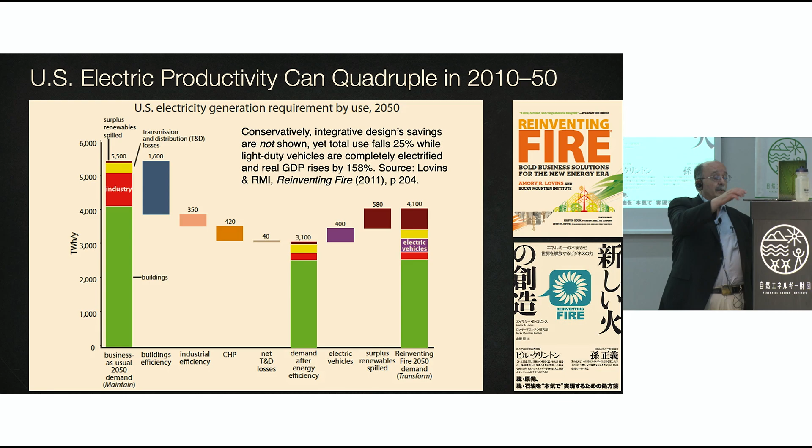Whatever exists is possible. More specifically, integrative design let our retrofit of the Empire State Building save 38% of its energy with a 3-year payback. Three years later, our cost-effective retrofit saved 70%, making this half-century-old government complex more efficient than what was then the best new US office or the best Japanese small office retrofit, where Takenaka saved 72% of the energy in their Higashikanto office without disturbing the occupants.

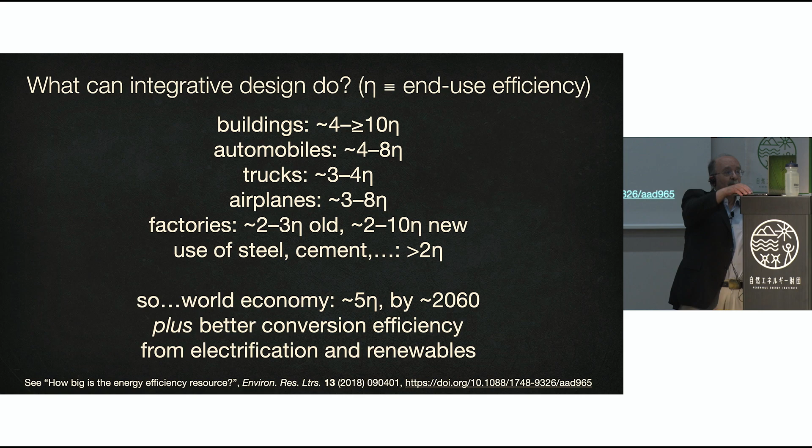Across all sectors, integrative design could raise energy productivity by about 5-fold worldwide and by probably at least 4-fold in Japan, especially if integrative designers were paid for what they save, not for what they spend.

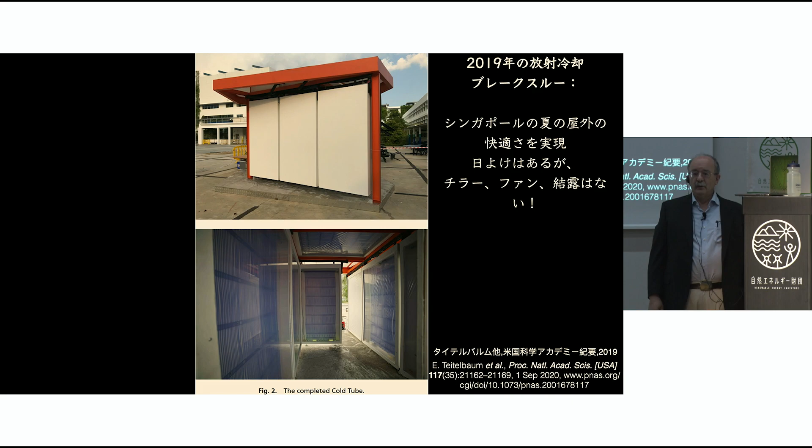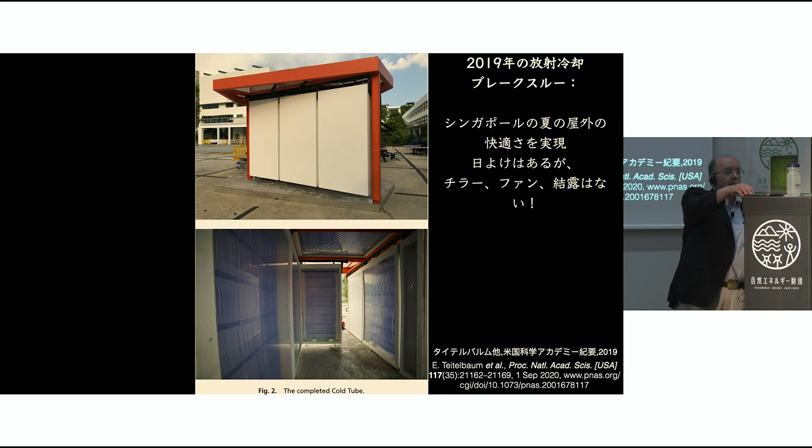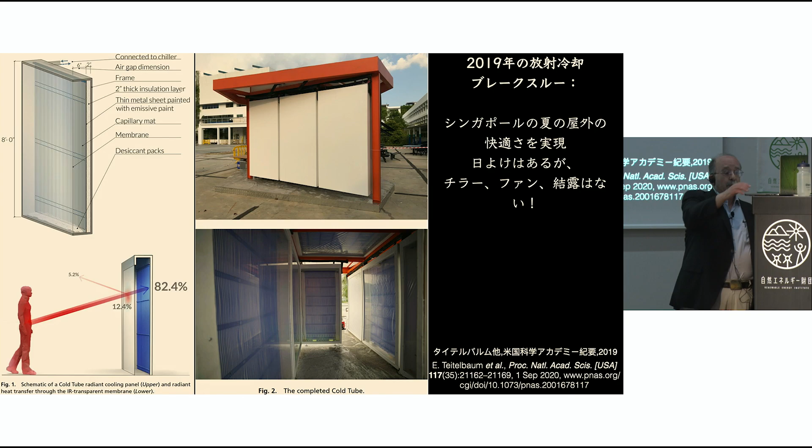Newer techniques are especially exciting. For example, the best big building air conditioning systems in Singapore are 3 times as efficient as the Japanese norm. They cost less, they work better, but they may just have become obsolete. In an experimental 10 square meter shaded pavilion, Singaporeans stayed comfortable outdoors without fans, without breezes, without cooling or drying the hot, humid air. How? Well, people were cooled solely by absorbing far infrared radiation from their bodies into vertical panels cooled to 23 to 25 degrees by circulating cool water, and separated from the humid air by a thin plastic film.

This arrangement delivered comfort in 32-degree air and 80% relative humidity. Such modest cooling can be done passively by special surfaces, proven also in Japan, that radiate infrared rays to the sky, providing Kanto or Kansai summer comfort with no or almost no electricity and with far lower peak electric loads.

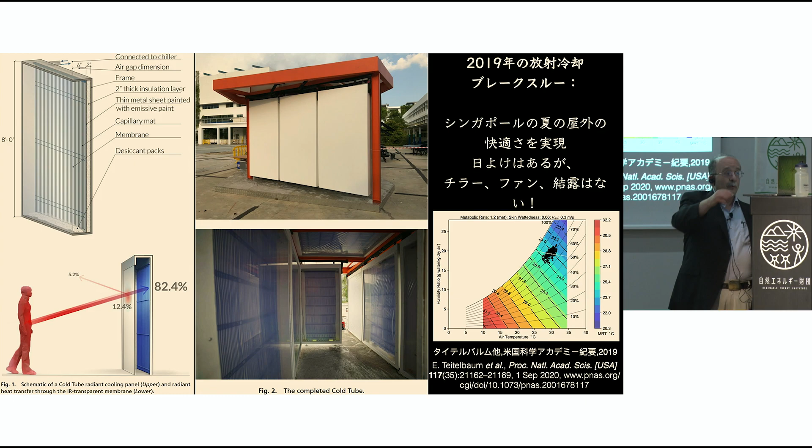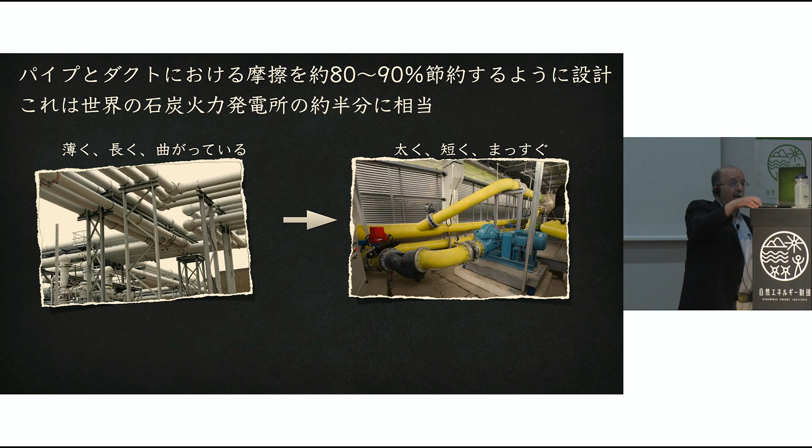For example, fully deploying better pipe and duct design in buildings and industry can save 80 to 90+% of the friction and therefore of the pump and fan power. If everyone did this, it could save half the world's coal-fired electricity, with paybacks typically less than a year in retrofit and instant in new construction. But this is not yet in any standard engineering textbook, government study, industry forecast, or climate model. Why not? Because it's not a technology. It's a design method. And few people yet think of design as a way to scale rapid change.

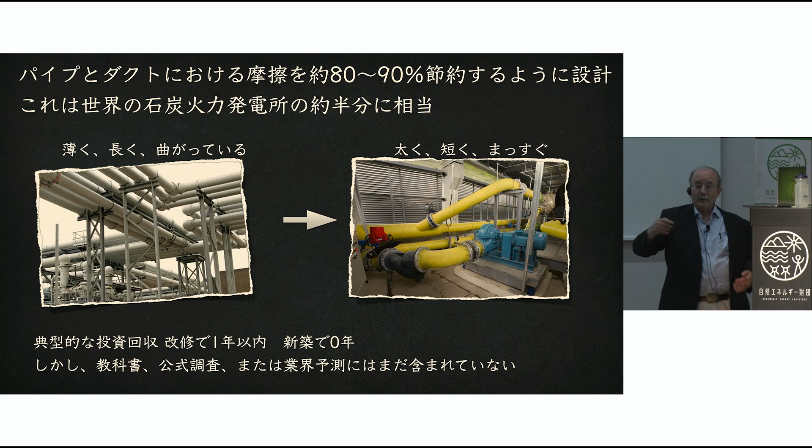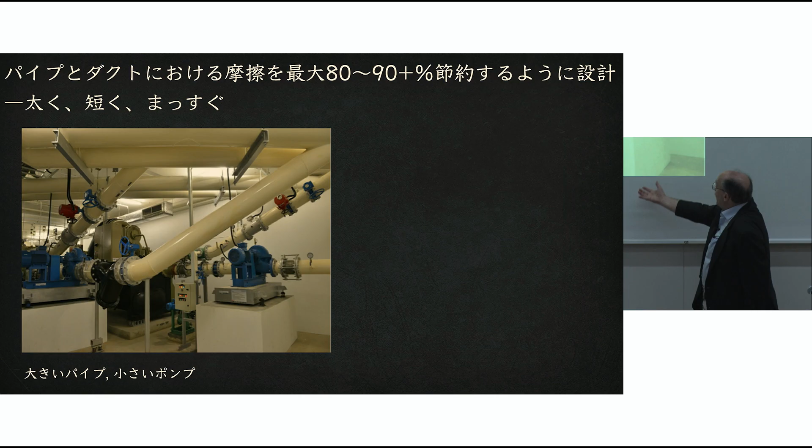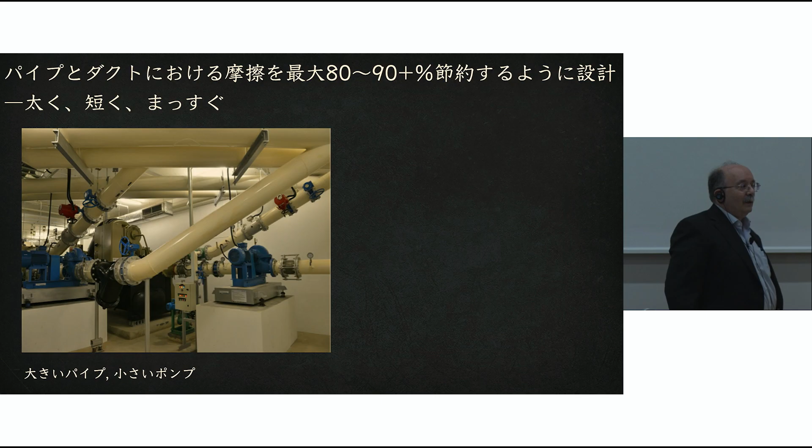To wring out friction, we simply use big pipes and small pumps, not small pipes and big pumps. And notice that this pump is raised up on a plinth to meet the pipe rather than dipping the pipe down to the floor to meet the pump and back up again with 4 elbows, 4 right angle bends, and much friction. To eliminate elbows and their friction, we lay out the pipes first, then the equipment. We lay out supply pipes as if they were drains. We bend minds, not pipes.

And each unit of flow or friction saved in the pipes saves 10 units of fuel, carbon, pollution, and cost at the thermal power station.

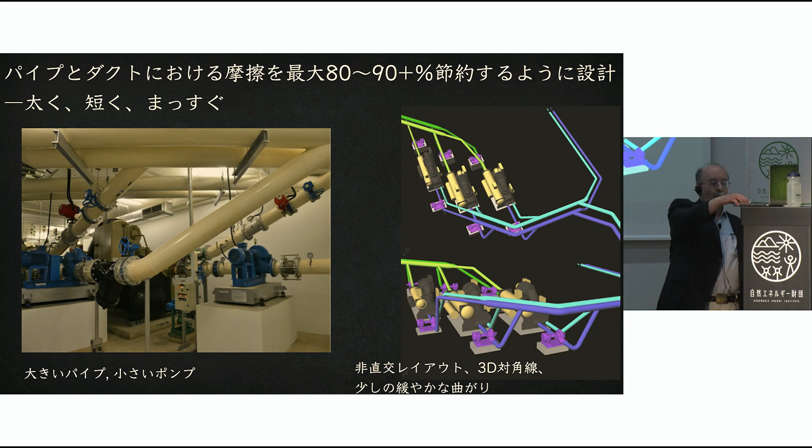Japan's mighty industrial sector makes and uses copious energy-intensive materials, like the cement and steel that now release 15% of the world's CO2. But elegantly frugal structural design can profitably save at least half of the world's cement and steel. For example, substituting tension for compression structures typically gives better strength, beauty, and cost with 1/8 the tons. Fabric forms can save half the concrete, plus further weight savings when you need less strength to hold up less weight.

3D printing of this airy bridge can eliminate most of the weight of the concrete structures that mainly support themselves, not their payloads. The stainless steel bridge is 3D printed.

Floor slabs are half the total weight of a typical mid or high-rise building, but a 5 centimeter thick folded concrete slab or a shallow vaulted dome can replace a 30 centimeter thick flat slab, cost less, and save 3/4 of the cement and all of the steel.

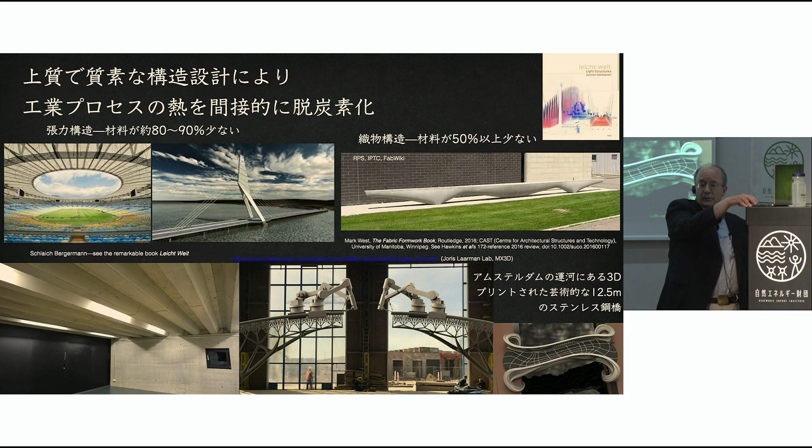Then a new building with thin floor slabs and better energy design can save another 15% of the core structural materials and 3/4 of the energy use, while increasing net rentable space by a stunning 55%, as in this Singapore building.

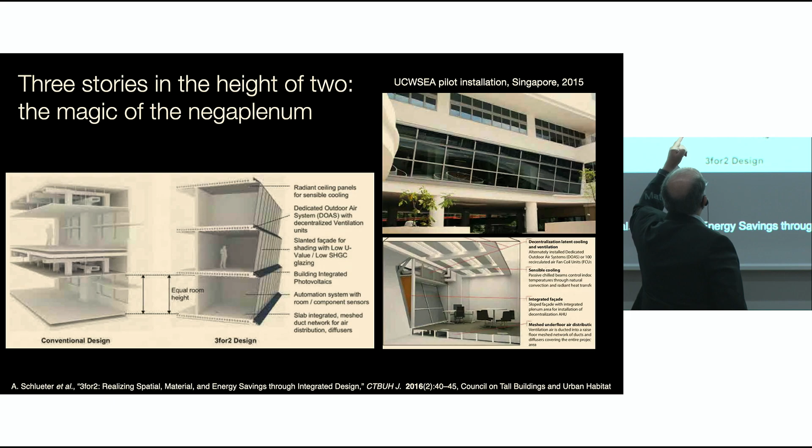How? Well, designing out a vertical meter of mechanical plenum at each story and using the thin slabs then allows you to fit 3 stories of normal 2.8 meter ceiling height into the vertical space now used for 2 stories. Cost, complexity, and time all fall dramatically. And imagine how this works at Japanese land prices.

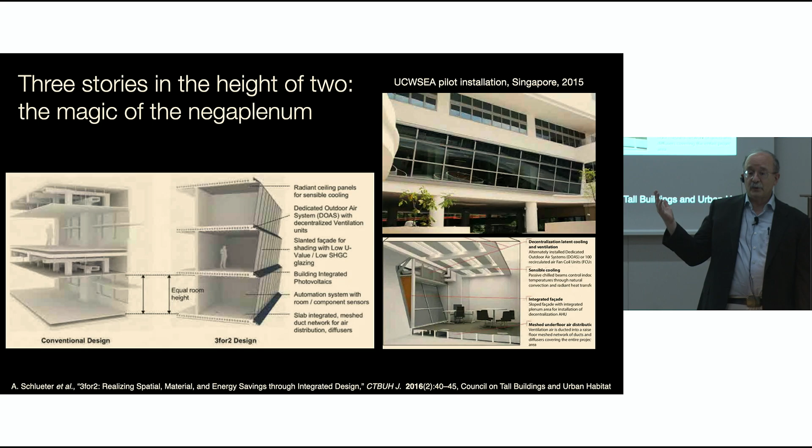But the utility, having tried and failed to prohibit solar hookups, then wanted to confiscate any leftover solar production without paying for it. Angry customers could then respond with smarter appliances that move 80 or 90% of the household loads conveniently into the solar hours, costing the utility nearly all its intended windfall and most of its ordinary revenue. So this anti-solar tariff is a well-aimed boomerang that will actually speed and expand solar adoption by educating and annoying the customers so they leave the grid faster.

Happily, RMI was able to help the Hawaiian parties agree on more sensible strategies, but it is now economic there, just like Japan, for new houses not to connect to the grid.

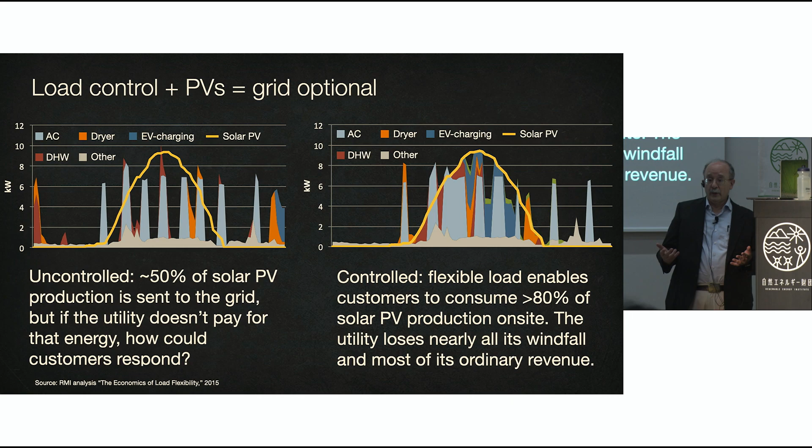This summary of 14 years of experiments with 4 kinds of time-dependent electricity pricing on 3 continents shows peak reductions above 30% or even above 50%.

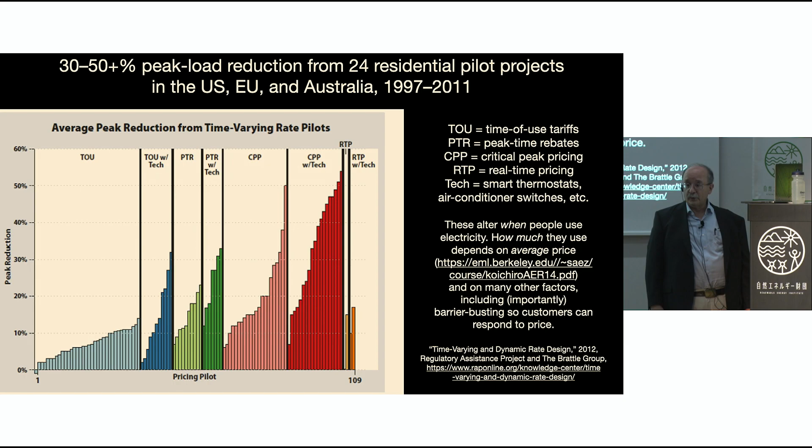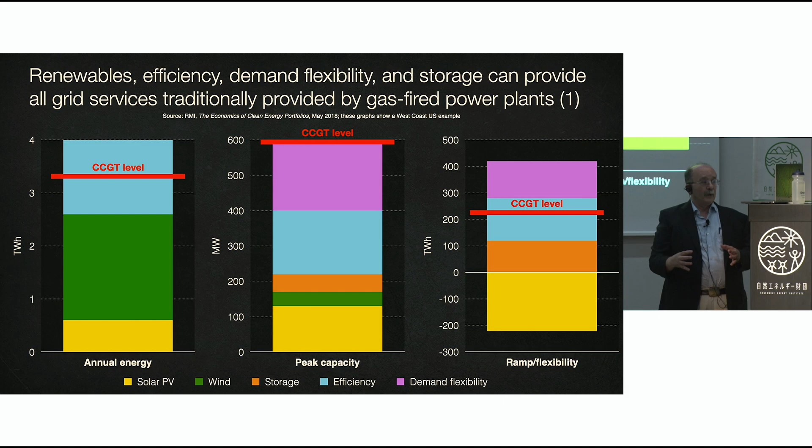Even with cheap US fracked gas, new and old combined cycle gas-fired power plants no longer have a business case. Their market is collapsing because all of their outputs - energy, capacity, ramping and flexibility, and ancillary services like voltage and frequency stability - can be provided better, faster, and cheaper by locally customized, carbon-free, clean energy portfolios, combining demand-side, renewable, and storage assets. U.S. investors promptly noted this analysis and canceled most of their planned gas plants.

By 2 years ago, only a single new gas plant in the entire United States could be briefly economically justified. Of course, U.S. gas costs far less than Japanese LNG, and neither country's gas price includes the value of carbon or of escaped methane or of price volatility in the fuels.

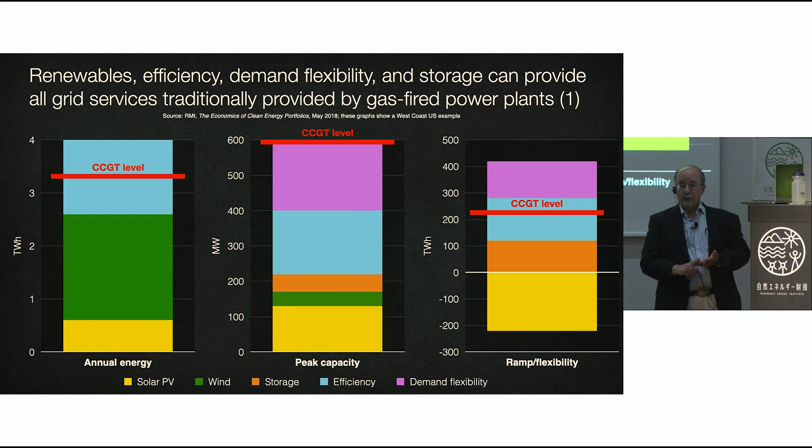So without burning gas or coal, how can we keep the electric grid reliable as it becomes renewable? Well, without fossil-fueled backup, shown in red, there are 10 carbon-free ways, conceptually sketched here, to balance a renewably powered grid reliably across all timescales. Our choices are not limited to big batteries, shown in magenta.

These typically come last, not first, so we need not wait for a storage miracle, although some are emerging, and the market isn't waiting. The two biggest resources, negawatts and flexiwatts, are both about three times bigger than commonly assumed, but there are eight others too, and some of them are very big.

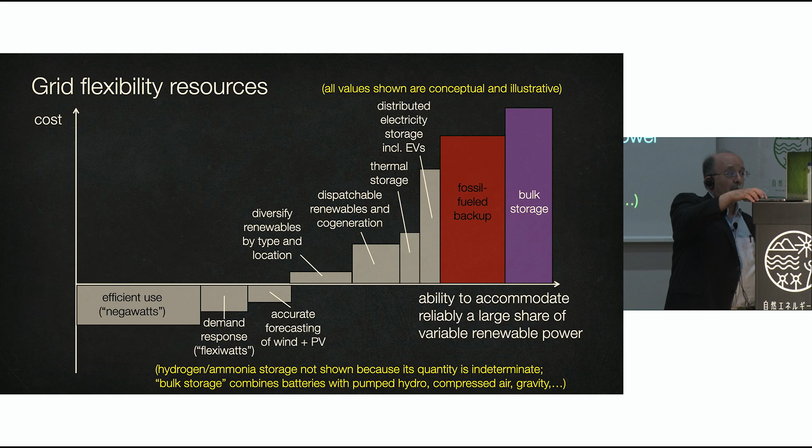For example, the electric vehicles now taking over the world auto market are starting to charge bidirectionally, and they could add at least several gigawatts per year of storage in a country like Japan, probably more, plus other valuable services. Two years ago, one European aggregator was earning an eighth of a million yen per auto battery per year by selling back to the grid 13 of 21 available services from vehicle to grid.

Australia now gets more frequency stabilization from batteries, demand response, and other inverter-driven resources than it does from coal plants, making that valuable service 39% cheaper in the past year, and soon electric cars will join that supply.

So Japan's policy of modest energy savings and favoring thermal power plants continues to be presented as necessary for energy security. We are still told that only coal, gas, and nuclear stations can keep the lights on because they are 24/7, while wind power and solar power are variable and thus supposedly unreliable.

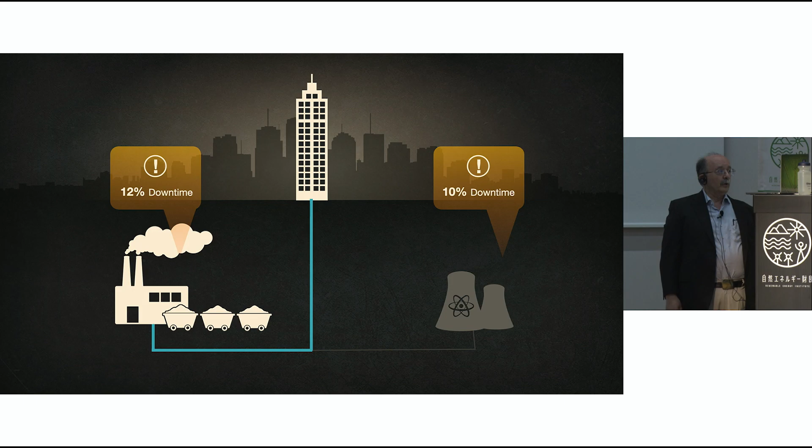Indeed, we built the grid because no generator is 24/7. They all break, and when a giant power plant fails, you lose one billion watts in milliseconds, often abruptly, often for weeks or months. Grids manage this intermittence by backing up failed plants with working plants. And in exactly the same way, but often at lower cost, grids can manage the forecastable variation of solar and wind power by backing up those variable renewables with a portfolio of other renewables, all forecasted, integrated, and diversified by type and by location.

Let me illustrate this with a difficult case that RMI analyzed 13 years ago: the big, nearly twice the size of Japan, hot, often humid state of Texas, which has virtually no hydroelectricity, a mainly Kansai-like climate, and a nearly isolated grid.

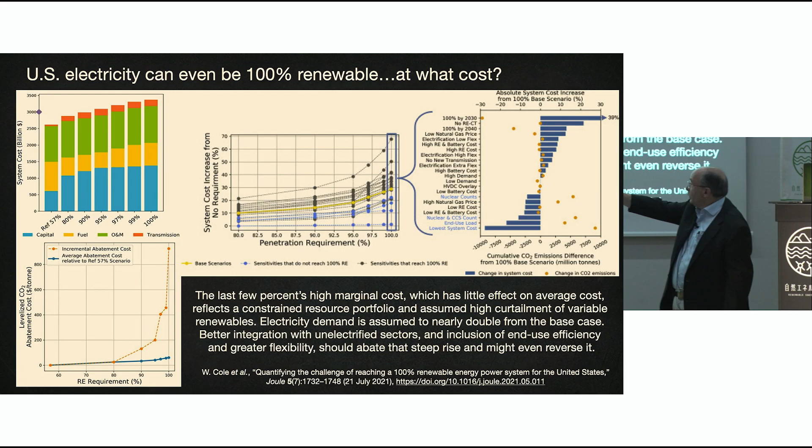In 2021, the U.S. National Renewable Energy Lab published a supply-side analysis of how much more it could cost the United States to go from 90 or 95% to 100% renewable electricity by 2050. And you see in the last 4 bars in the upper left that the average cost increases very little. Now, in the lower left, you see a steep rise in the marginal cost. Why is that? It's probably an artifact of the models omitting many important solutions, which I have summarized already.

For example, the same national lab competed efficiency in buildings against storage very conservatively and found that this can cut investments by about a factor 10 by displacing long-duration hydrogen storage and green electricity to make it. In 4 key U.S. regions, the supposed need for long-duration storage, for example, by hydrogen or ammonia, simply disappears. In the region with the climate most like Kanto, it decreases by 97%.

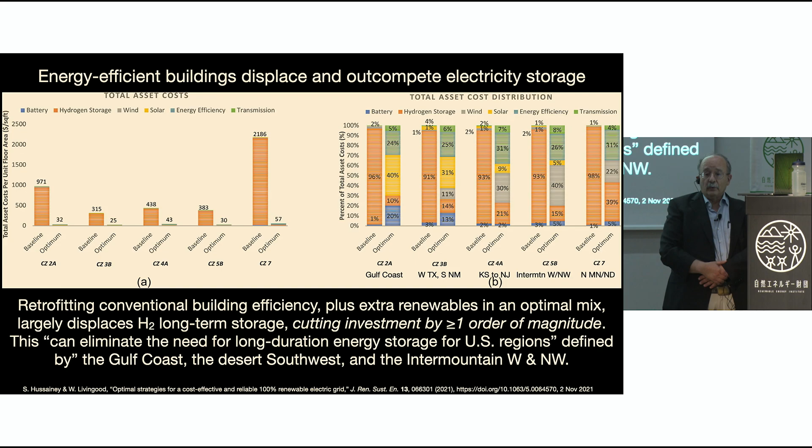2 weeks ago, a major U.S. government study showed how to save up to 41% of U.S. buildings' energy use and 91% of their carbon emissions, and found this would cut power system costs by over $100 billion each year. That's a third of the total cost of decarbonizing the U.S. grid.

Now in Japan, and for 82% of global power generation, unsubsidized renewables, solar in yellow, wind in blue, are now the least cost source of new bulk electricity. Bloomberg found that the cheapest way to meet a flat load is now solar or wind power, plus backup, which can be demand side, storage, renewable, or fueled. Putin's war makes avoiding insecure fossil fuel imports at volatile prices even more valuable.

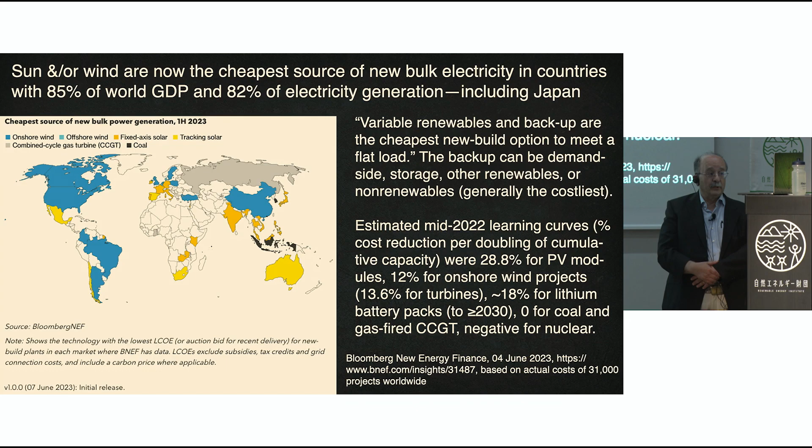As efficiency helps renewables save fossil fuels faster, renewables are beating thermal power almost everywhere with stable and several-fold lower costs and true energy security, especially from distributed generation. Our home's rooftop solar power works with or without the grid. So should everyone's. Resilient connections to the grid should be the standard design, especially in a country with earthquakes and typhoons. Flourishing microgrids, mainly to improve resilience, are now being delivered as a turnkey service in 28 of the United States.

And today, Japan's new solar electricity costs less than 10 yen per kilowatt hour. That's about half the operating cost of fully amortized coal-fired or LNG plants. New solar also beats restarted nuclear plants. So Japanese solar and wind power outcompete existing thermal stations and should be dispatched first, before inflexible nuclear plants, to unburden customers and boost Japan's competitiveness.

But national and utility policies still shield legacy assets from competition by doing the opposite of economic dispatch. So curtailment, that is, idling existing renewable plants in order to run costlier nuclear and fossil plants, has now spread to every region of Japan except Tokyo.

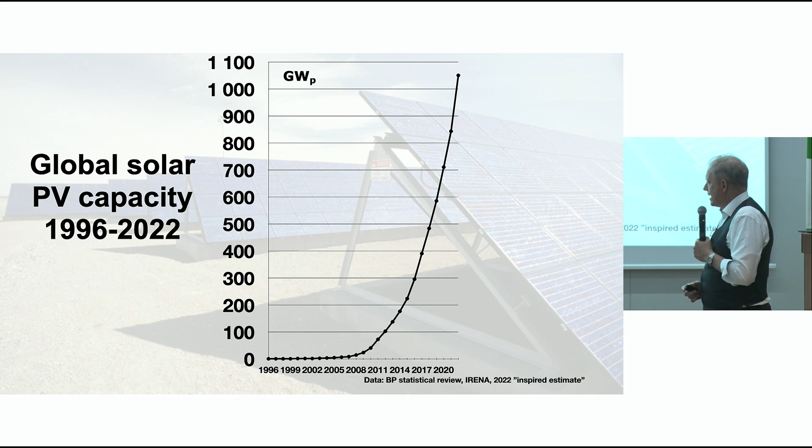And what we've seen since is that indeed some countries have subsidized solar and wind power. If you look at the solar development here, you can see that the deployed PV capacity in the world has risen exponentially during the last 3 decades. Here, Japan was early in the late 20th century deploying solar PV. Japan had the most advanced solar PV manufacturing in the world at the time.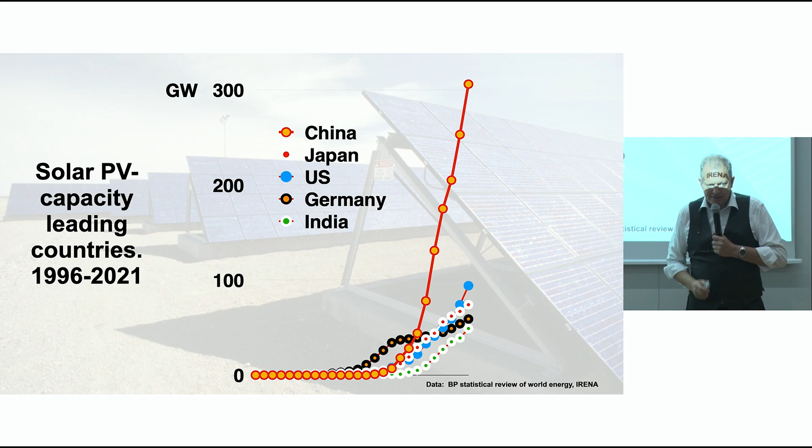Then Germany started subsidizing solar, and for the first few years of this century, German households paid for a lot of the industrial experience that was accumulating, first in Europe, later in China. China also started to deploy solar PV and is now by far the leading country in the world. The US is number 2, and Japan is in solar not so bad. Japan is number 3.

As a result, costs did come down, and 2016 was a magnificent year for decreasing the cost of renewable electricity. In February, in Peru, solar electricity was purchased at a price below 5 US cents per kilowatt hour, which was then considered tremendously low. Some people said this is not possible, it's too low, it won't happen again for a long time. But already a couple of months later in May, in Dubai in the Middle East, they managed to procure solar electricity at below 3 cents per kilowatt hour.

And before the end of the year in September, in the neighboring emirate, they came down below 2.5 cents per kilowatt hour. And in Mexico, in the following year, in 2017, there was solar electricity purchased below 2 cents per kilowatt hour, below $20 per megawatt hour. In Portugal, in southern Europe, we came down to below 1.5 cents per kilowatt hour, euro cent though.

And then in 2021, the contract in Saudi Arabia at around 1 cent, which I think is still the world record in publicly announced procurement price for solar electricity. And 1 US cent per kilowatt hour, that is very cheap.

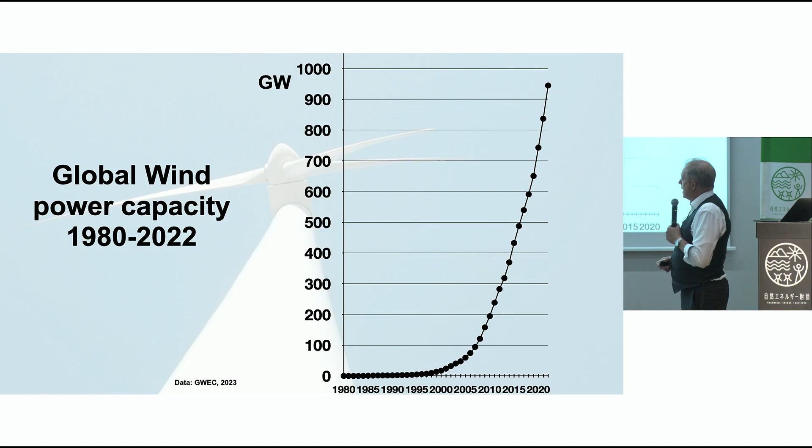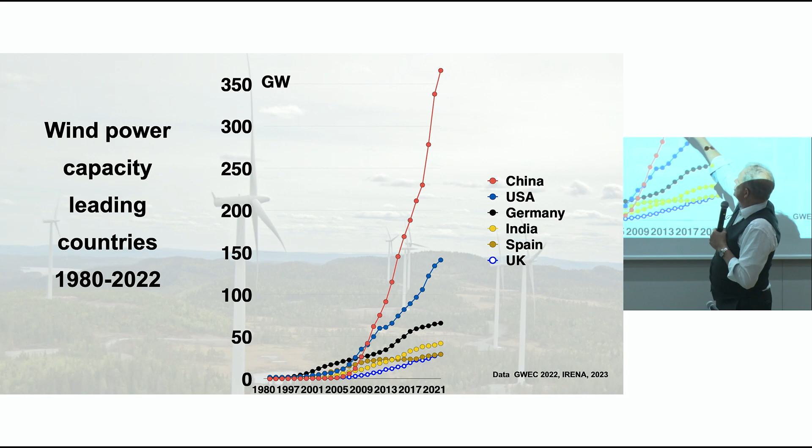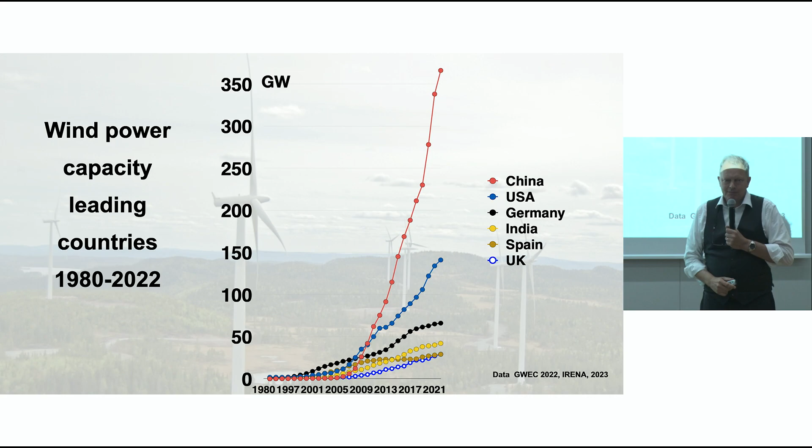Wind energy increased in a similar way, has not yet passed 1,000 gigawatt, or has passed this summer, but had not at the end of last year. For wind power, it's the same. Germany paid a lot in the beginning of the century. Since 2005 approximately, China has taken off and is now by far the country with the highest installed capacity of wind power. The US is number 2. Japan is not on this list. Here we have Germany, India, Spain, and United Kingdom as the top countries in the world.

Costs were also coming down in 2016. We saw in Morocco in North Africa prices between 25 and 30 US dollars per megawatt hour, 2.5 to 3 cents per kilowatt hour, and the world record still, I think, for publicly announced contract price is from Mexico, where Enel promised to deliver below $18 per megawatt hour.

Offshore wind, which is now on the agenda in Japan, was for long considered to be a source of electricity with a huge potential, but unavoidably high cost. Here too, costs and prices came down during 2016. In the summer in Europe, there was a procurement off the Dutch coast where Danish company Dong, now Ørsted, won a contract with a price of just above 70 euros per megawatt hour. It was then considered record low, but it's still high.

Nothing happened in August, but in September, Swedish power company Vattenfall won a bid off the Danish west coast with a price of only 60 euros per megawatt hour. And nothing happened in October, but in November, Vattenfall won a contract off the Danish east coast at Kriegers Flak with a price below 50 euros per megawatt hour.

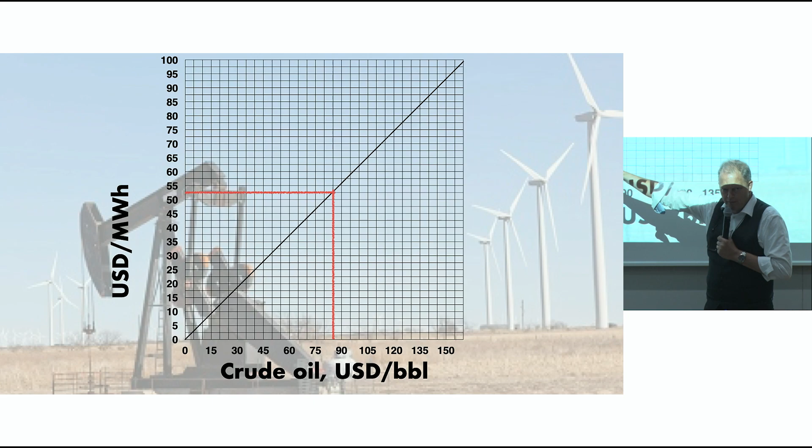And those of you with the capacity to memorize numbers more than 5 minutes, you remember that we have seen prices for solar and wind power in this range from $10 up to maybe $30 per megawatt hour, meaning that the total cost of solar and wind electricity is now just about half of the price of the energy in crude oil. And that makes it feasible to start replacing oil with renewable electricity in other sectors. And we have seen it starting.

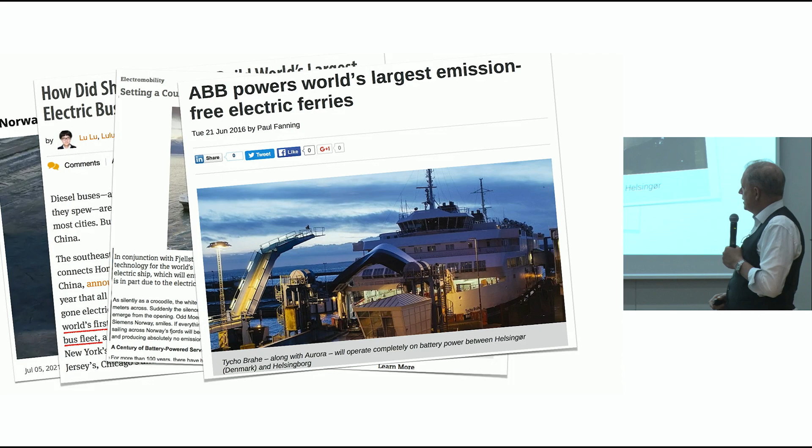We see it in the automotive sector, where cars are increasingly electric. We see buses that are electric. Quite impressive here, Chinese city Shenzhen, where already a few years ago in 2018, 100% of the city buses were battery electric. There were more than 16,000. Ferries can be made battery electric. Short line like that, slightly longer like this between Sweden and Denmark. And you can have electric airplanes.

I must admit I said very self-confidently 15 years ago at a conference that we will never see a battery electric airplane because batteries are too heavy. I was wrong. There was a very polite young man in the audience. He didn't say anything in public, but afterwards he came up with a little note saying, check this website. I checked the website. It was a Chinese company already 15 years ago offering a two-seater aircraft that was battery electric and had a range of 2 hours. Since then, I've never said it's impossible.

It is possible. Airbus, the European airplane manufacturer, put out this two-seater trainer aircraft in 2015. We now have companies like Heart Aerospace developing battery electric airplanes. And it's so attractive they managed to sell the planes before they even constructed them.

When this happened, that batteries were increasingly deployed in the transport sector, the battery manufacturing increased. The battery manufacturers accumulated experience, learned to bring down cost, and they got economies of scale because the automotive industry needed a lot more batteries than we do for our laptops and our mobile phones. When Tesla built their first so-called gigafactory, the large battery cell factory to supply the Tesla cars, they roughly doubled the world's production capacity for lithium batteries. And of course, cost came down.

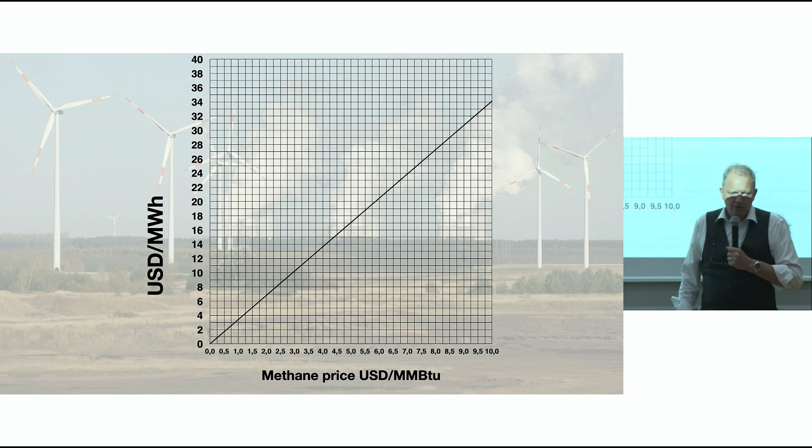Fossil gas, natural gas, is also difficult to see how the price relates to the electricity price, because here the unit is even more strange. It's US dollars per million British thermal units.

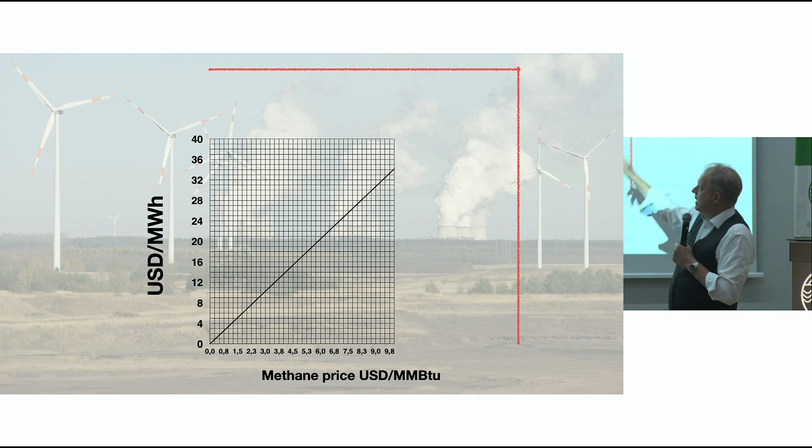Anyone who recalculated that into dollars per megawatt hour today? Not so usual, but it can be done. What used to be a typical price of about $8 per million British thermal units would still be at the level of solar and wind. But now, in the last year, we've seen a shift where gas has become more expensive, and now that is also at the level of oil, and thereby more expensive per unit energy than renewable electricity.

And thus you can start using electricity to produce hydrogen to replace fossil gas. Many see the opportunity in the Middle East. Abu Dhabi, for example, sees this opportunity to produce hydrogen and attract energy-intensive industries. In Europe, Portugal and Spain have a similar ambition.

When you can produce hydrogen at a low cost from electricity, you can go one step further and produce liquid fuels, electrofuels. Then you need carbon dioxide. Today that's easily available because you burn a lot of fossil fuels, but you can also be more ambitious for the long term and say we will only use carbon dioxide from biomass, which is recently taken from the atmosphere.

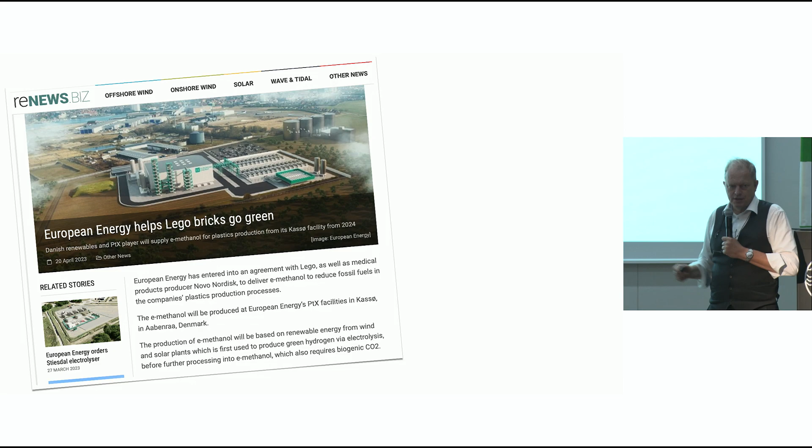In Europe there are two examples. One is the Danish toy manufacturer Lego, making those small plastic pieces. They've contracted a supplier of feedstock for their plastic manufacturing that is using electricity to produce hydrocarbons that are then used to produce these plastic pieces.

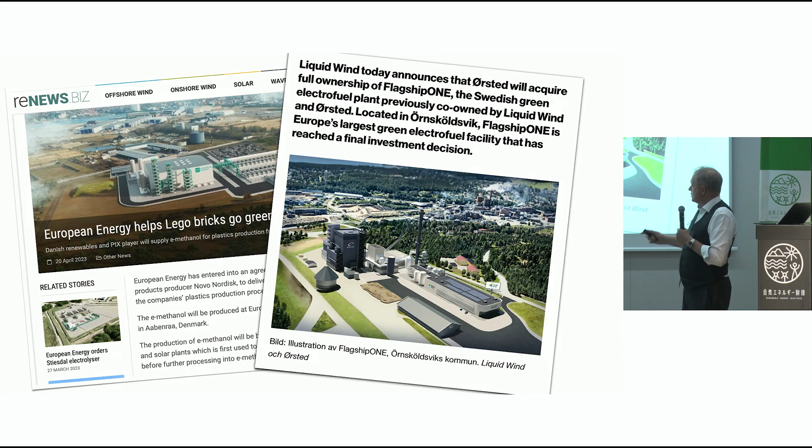And in Sweden, we have a project now being under construction where the intention is to use renewable electricity and carbon dioxide from a biomass fuel cogeneration plant to produce methanol, which is going to be sold to intercontinental shipping, where battery electric solutions are not yet viable.

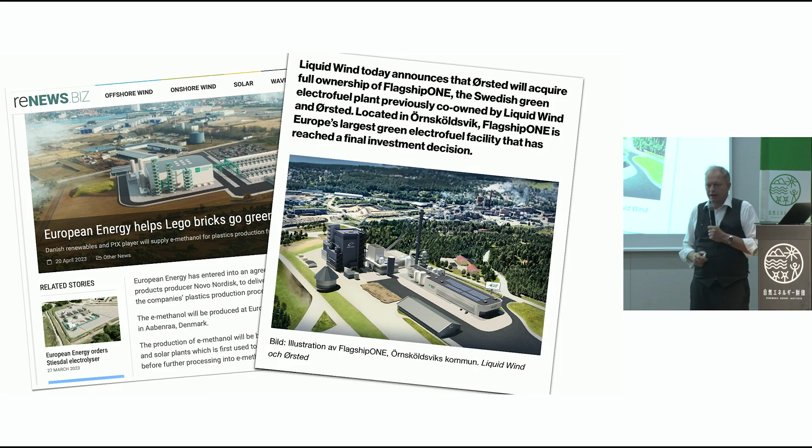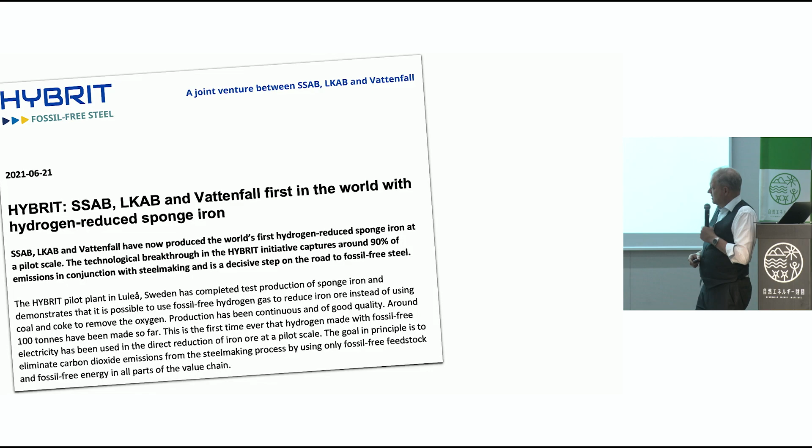Coal is the cheapest of the fossil fuels, but still now in the range of the best solar and wind electricity in the world. And that gives the opportunity to use this hydrogen to replace coal in the reduction of iron ore into steel that can then be produced without carbon dioxide emissions in the process. There are other competing technologies to do this, and the demand for steel produced without emitting carbon dioxide will increase.

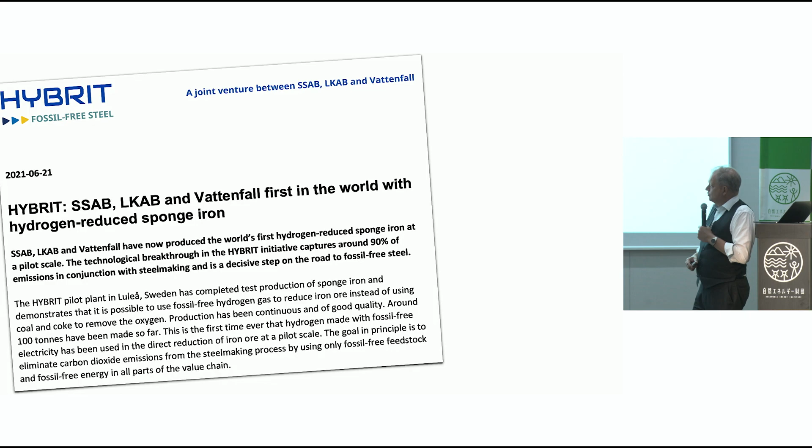In this project in northern Scandinavia, the first sponge iron was produced with hydrogen in June 2021. Two months later, the first steel was produced, and another two months later, the first vehicle using this steel was constructed. Can be done. What did you say?

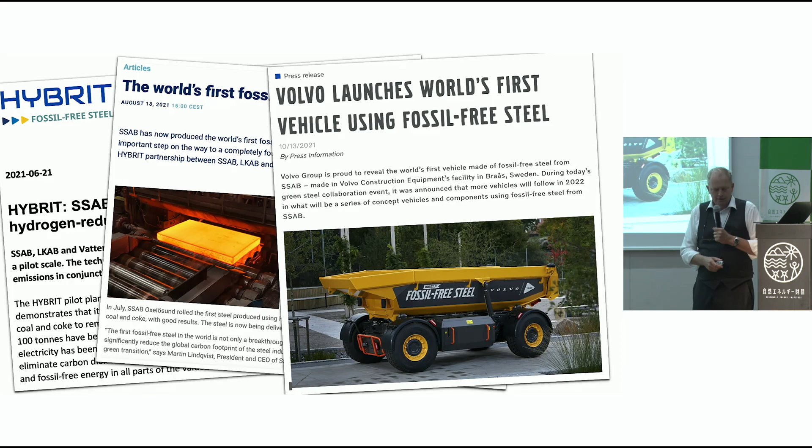Things that exist in reality are not impossible. Right.

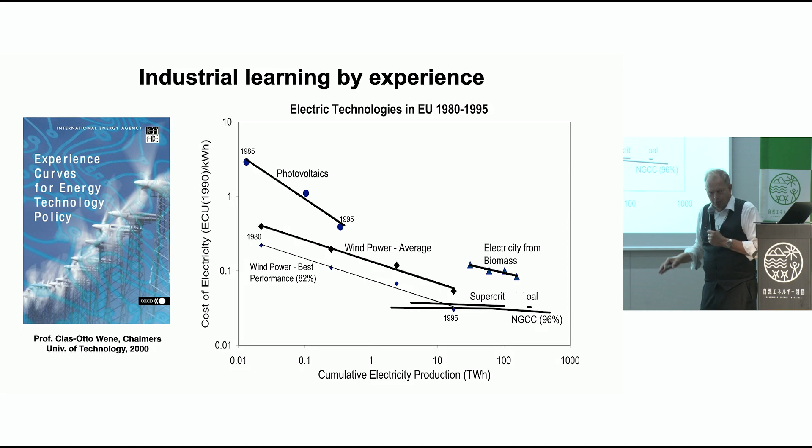So these learning curves did prove to be possible to achieve. Solar and wind power is now cheaper than thermal power, often even cheaper than continuing to operate existing fossil-fueled and nuclear power stations. We can see these diagrams made where wind, solar, offshore wind has become cheaper. Coal is no longer becoming cheaper, and nuclear has become more expensive in recent years for different reasons.

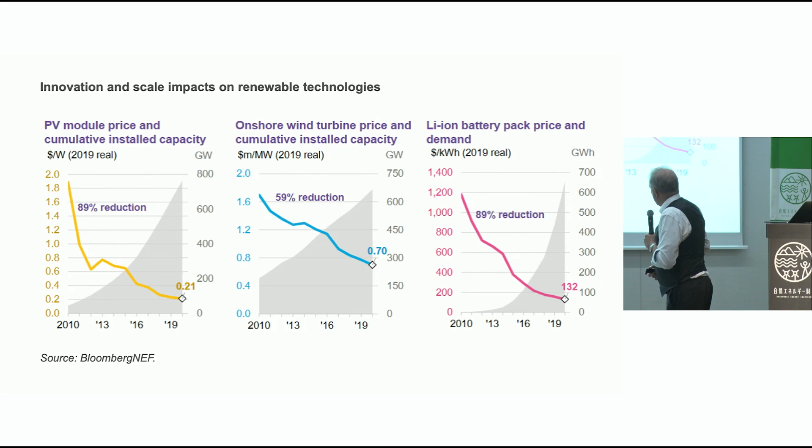And in addition to PV and onshore wind, we should also note what Clas-Otto Wene did not have in his diagram, that with the electrification of the transport sector and the increased production of batteries, batteries have also become dramatically cheaper. They cost about a tenth now of what they did a decade ago.

The International Energy Agency in Paris, which most of you know of and that's globally respected in many ways, they have, on the other hand, been criticized over the years for underestimating the future development of solar and wind.

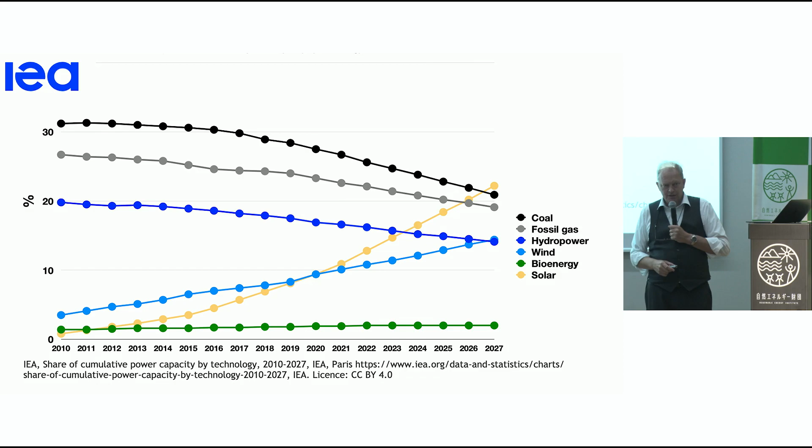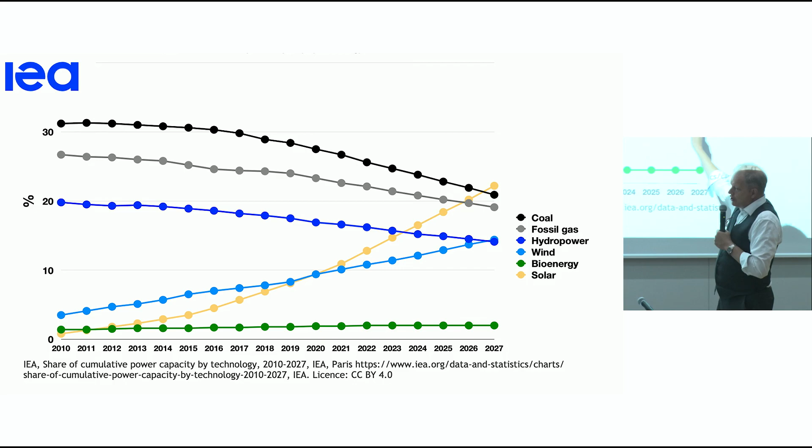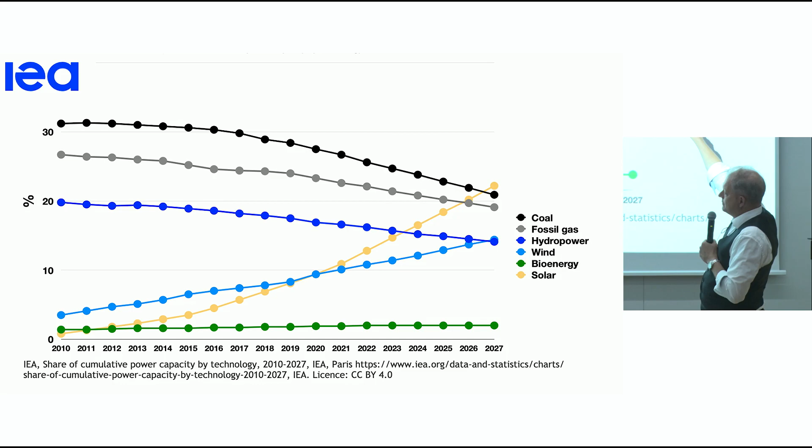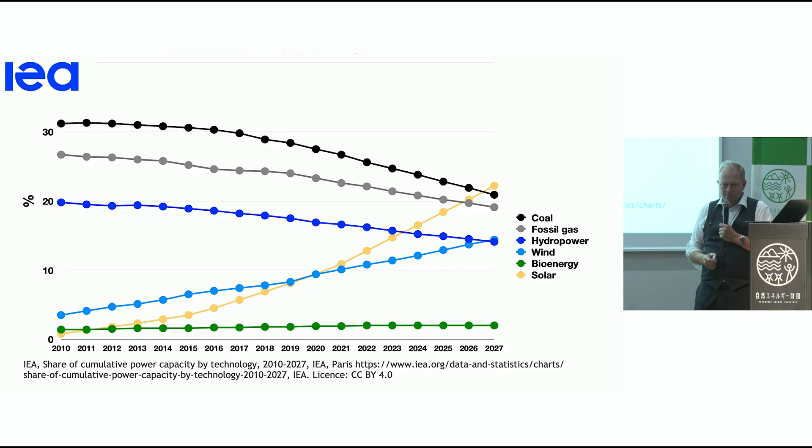If they are still underestimating solar or wind, then we're in for something really dramatic. Because now, since about a year, in the projections made by the International Energy Agency, they show, for example, this one from a recent report, that solar will become the largest capacity for electricity generation in gigawatts in the world, passing first hydro, then gas, and then coal before 2027. That's not many years into the future. Solar will then have the highest capacity. This is really showing a disruptive change of the global electricity system.

But again, it is not only a matter of electricity. Low-cost electricity can also be used to replace fossil fuels in other sectors. And that means that today, one could even say that it's profitable to avoid taking the risk of facing unmanageable rates of climate change. But it does require a lot of intelligent people who understand the opportunities and actually use them. And that's not necessarily going to happen. But if a lot of us try, it might.